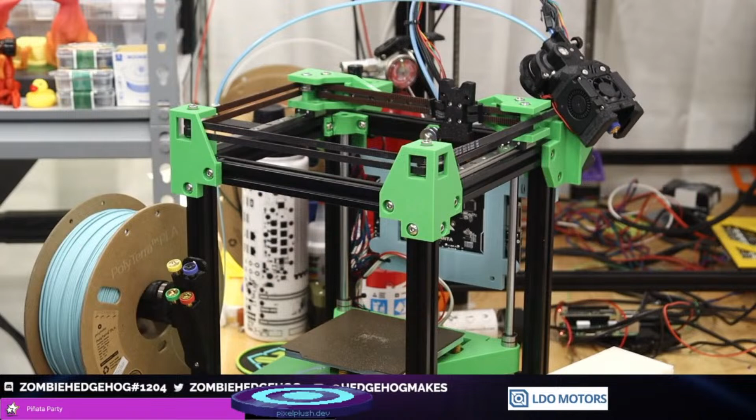I have two of these NDI cams. I'm going to delete this one. That was the wrong move. Wrong one. Okay, that is the correct one. This one I delete. Yes. Yes, okay.

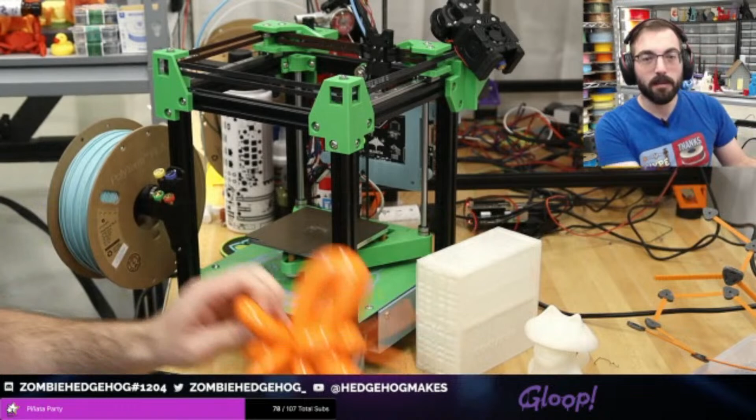I gotta gloop it on when I get my ABS glooping. But this stuff right here, this is PVB, originally developed by Polymaker as an alcohol smoothable material, but printable like PLA. So you dry it pretty well, you print it, and then you spray isopropyl alcohol on it, and it turns shiny, and it kind of melts the outer surface, which creates a really nice smooth finish.

You can kind of see on the bottom here, this is all smooth, so it's really kind of soft, and it kind of feels plastic-like, you know what I mean? It has that kind of texture. But it does a great job of hiding layer lines and stuff like that. So depending on if you like the look or not, you might want to look into Polysmooth.

I did that as a test because it has very similar properties to PLA, except for heat resistance, and I think it actually has more heat resistance than PLA. So your mileage may vary. I'm not saying this is the best material in the world to build printers out of, but give it a shot. What's the worst that could happen? It just stops working, I guess. But I'll be putting this through its paces.

I had one fracture in this part right here due to shipping, and then this broke down here due to shipping. Otherwise than that, it seems pretty good.

Yes, it's very similar to acetone smoothing ABS. In fact, if you had Polymaker's Polysher, you could just throw these parts inside of it, let them cook, and then you have a nice, beautiful, smooth part. And yes, much, much, much safer than acetone vapor smoothing for ABS. I wouldn't even really consider that. I bought some, but just for welding, and even then it's just not something that I want to use or recommend.

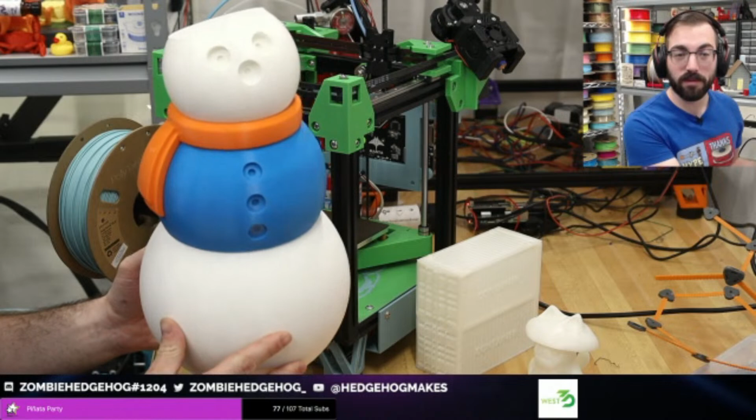There was just a model released that's a party hat, and this Friday, 5/12, May 12th, is my birthday, and I'll be using this platform in probably the same configuration to stream onto both platforms, and we'll celebrate my birthday. So I'll print off that hat, I'll throw it on here, I'll print off the rest of the missing components.

I think I have the arms around, but I put it away because I only have limited space in my studio, and I had it out for many months. So it's going to make a return. I'm very excited because this took a little bit to print, and this is all poly smooth, but I didn't smooth it. I found the finish to be pretty nice, unsmoothed. So I'm happy.

So no hat yet. It was literally just released like a couple hours ago. So I'm pretty excited.

Yeah, Steve knows. In fact, it's the whole thing with Steve, Modbot, Nero - those viewers wanted me to stream on YouTube because they don't like Twitch. So you're getting the Twitch experience on YouTube. I hope you like it. It's literally the same thing, just a different interface.

But let's see if I can do this. So how's the volume of the audio? Is it any good? Happy almost birthday. Well, thank you - 2 days. We'll have some fun.

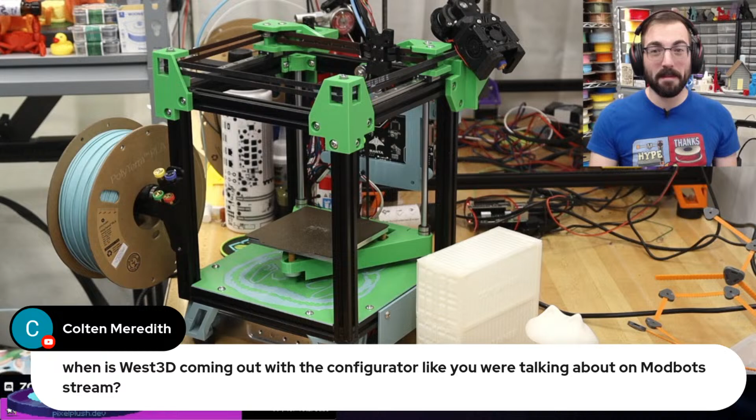So let's switch back to this one. Yeah, there we go, this one right here, and then we'll talk about the Rook. Oh, I can do this? Can I? Oh, this is why I like StreamYard, because I can do this. Bam, that's amazing. When is West 3D coming out with the configurator like you were talking about?

Okay, so that's coming out whenever I finish the Rook. So you're waiting on me to essentially verify that the whole thing is done and ready. I think he can probably release it as is once he has all the parts. So maybe we're waiting on some parts coming in, etc. But when all the parts are in, then he'll release it. And then he's going to come up with either an upgrade path or a special kit that uses my recommended parts. So if I'm recommending a different motor or a different hot end, etc., it's probably going to be a slightly more performance pack type of thing. So I've been working on that, and Gulsifer has been doing all the design for it, and we'll see what we can do, because it's a lot of fun.

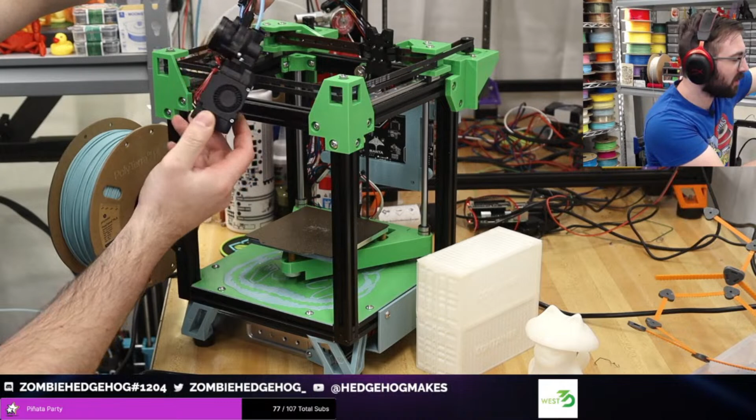So back to this. Again, this is Rook 2020, and I decided to use the Dragon Burner. This is a tool head for V0, right? It's a nice little compact, there's almost no printed parts. It has a Revo in it, Revo Voron, and an LDO Orbiter. And this is the nice little package that I put together for this build.

And we're about to replace the back plate. I might need to put on this side. There we go. So this little mounting plate right here, it puts the tool head a bit too far back and interferes with one of these rear components. So Gulsifer made it a little bit thicker, and we're going to install it.

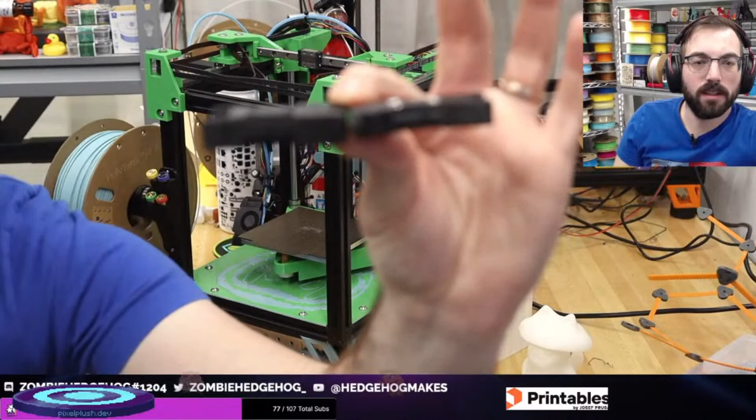So it's a little bit thicker and printed better. Because wow, that's printed a lot better. That's insane. Let's see if I can zoom in on that, because that's kind of interesting.

Focus. Oh, just press it manually. There we go. So this one right here was printed on the Kywoo. You see what kind of walls we're getting on that Kywoo? They are nasty. It's almost like fuzzy skin mode.

And this was printed on the Rook itself, like a little bit of self-replicating parts. So much better surface quality compared to whatever the heck that printer is doing. Ugh. So that's the reason why you want to build your own printer.

Yeah, new song. Is it Belted Z? Yes, it is. It is in fact Belted Z. When you turn off the printer, this gantry will just fall. So I'm currently trying to work on a better end stop because it will slam against the end stop, and the end stop is just mounted with PLA. So yeah, we'll try to make a better end stop or something for it. In fact, sensorless homing works really well in these printers because you can just slam it and force it at the bottom.

What filament is that? This filament right here is Galaxy Black from Polymaker, which is one of my favorites to just use as a random filament. I just print stuff in the Galaxy Black because it looks so damn good. That's my go-to. We're actually talking today - would you guys be interested in more Galaxy colors? Not the metallic, but the special Galaxy powder they use. And if so, what colors would you want from Polymaker in Galaxy?

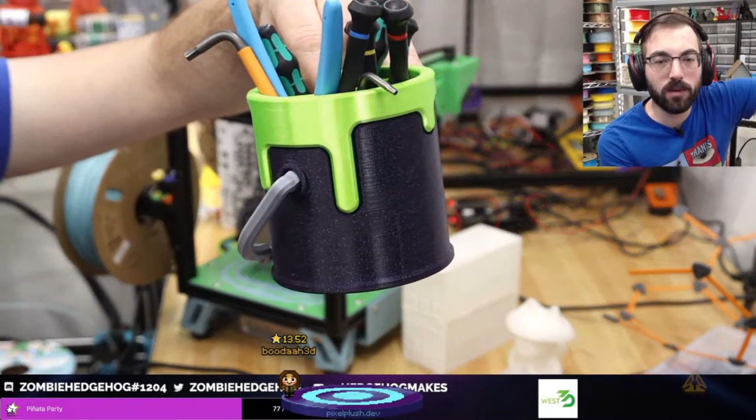So go take a look at their site and see what they currently have. The Galaxy Dark Blue is my favorite. I should probably reprint this because it's not the best quality, but the actual glitter used in it is not just regular glitter. It has like a blue sparkle to it, and it looks really good. I quite like it. It's subtle, but I love that effect. So I'd be interested in some more colors of that, for sure.

A couple thin TPU bumpers at the bottom. Well, that's the thing, it has to have an end stop. And nope, drop does not work on YouTube. That's why you want to go over to Twitch, because you get drop game.

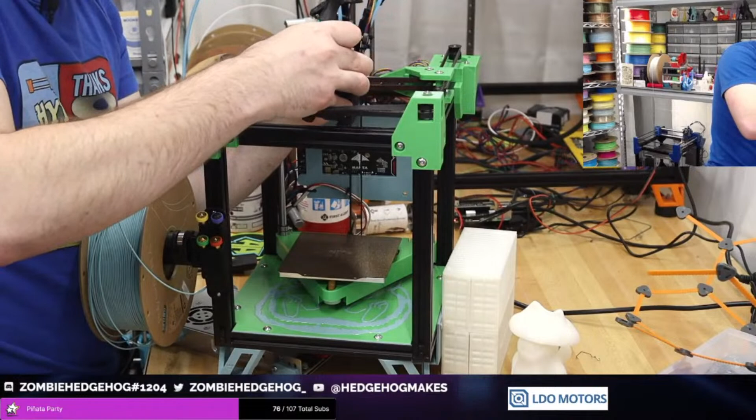Let's see, this connector is very finicky how I have it, so I gotta somehow get it in here. This tool head... oh wow, how did I have this last time? Nothing else has changed, right? Why is this being annoying? I think I had this very closely shoved in here, and now it's just not liking the orientation it's in or something. Let's see if I can fix that.

Upgrade all the things, yeah you can, just don't expect to upgrade and get perfection. You have to put in work, you have to tune your printer, you have to use it. You might have to change, might even have to change stuff in your slicer which you wouldn't even think about. If you change out your extruder, for instance, you might have to change your flow or your pressure advance or something, even though it might seem like you don't have to.

Finally done with the testing. Yes, we're done with testing. We are live streaming like a pro streamer.

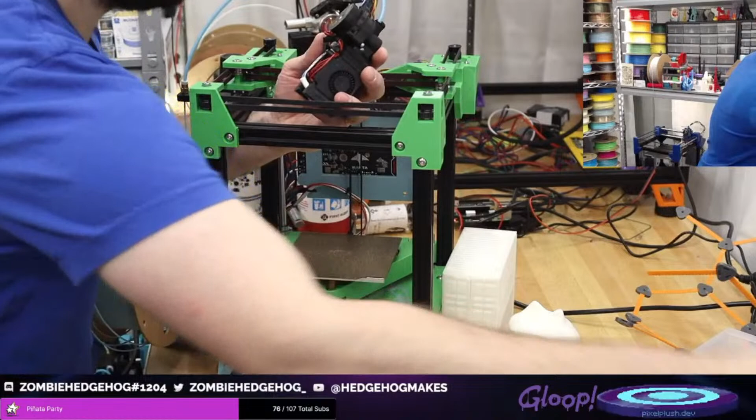Just trying to see how this went on originally, because my little setup isn't happy. I don't know why it's not happy. What I'm probably going to do is just trim some of these zip ties and figure it out as I go, because, whatever.

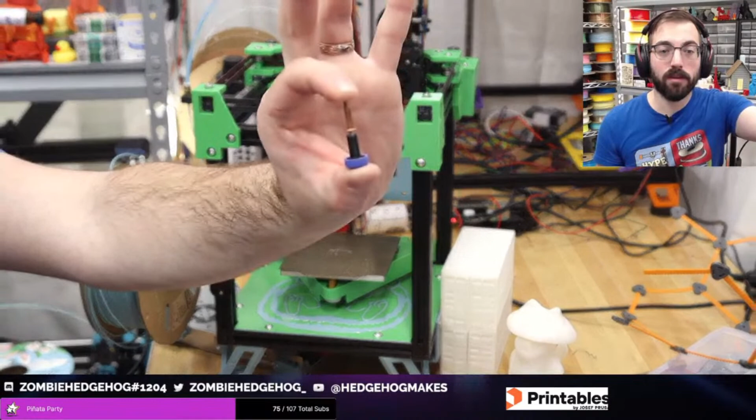I got this nice Revo holder designed by Mad Monkey, which is nice and incognito because I'm using that Galaxy Black filament. It's nice to be able to use a printer that's essentially all PLA, because you can just print anything to use anything. PLA works great for printer parts.

It does, but the issue is heat. So maybe on this printer, on the motor mounts, you might have to replace them sooner, or screw in your screws once in a while. But I find even with ABS, if you're printing in a hot environment, you still need to tighten your screws and adjust stuff. So if you're not printing ABS, just print your printer parts in PLA and call it a day.

I think these printers really prove that it's possible. Is it optimal? No, it is not optimal. I would not suggest or recommend you do that, but if you want to try it out, go ahead, give it a try. You might be surprised how well PLA works for printer parts. It's actually stiffer than ABS, and under normal conditions your parts shouldn't crack. That's kind of a rarity, it shouldn't crack unless you have very poor filament. If you keep it cool, it'll work.

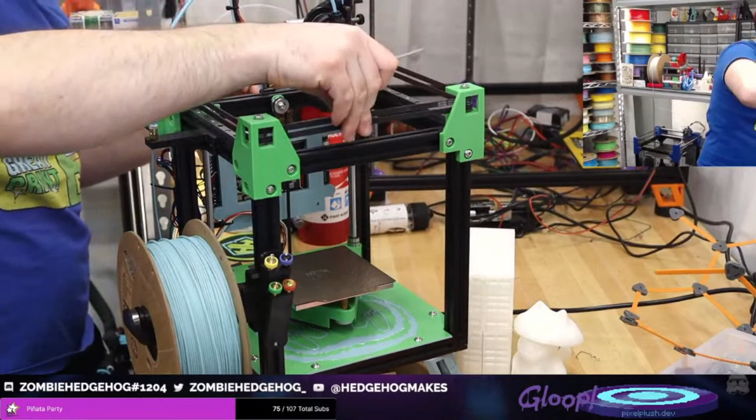Let's see, I gotta tighten this. The motor tensioning system isn't optimal. Any printer that uses the motor mount to tension needs improvement of some sort because it's just not great. So this will be good enough for now, it's not really that tight, but we'll deal with it.

There's nothing that limits you to only one type of filament on your printer, just be careful where you put materials. I had a fully PLA printer printing ABS parts for a couple weeks. The only thing that got loose was the shroud on my hot end, that's it. It was actually kind of shocking how well it worked if you don't have a super high ambient temp.

Have they come out with the hardened Revo? Yes, that is this, this is a hardened Revo. In fact, to install it, you just do this: you take your Revo and you unscrew it. I have filament loaded right now.

Looks like a green wrestling ring. I know it does. I don't like how there's a belt in the front here, because it means you can't look at anything neatly.

So we just removed the Revo hot end or nozzle, and I can put it into here. I can swap it out with the Obsidian, and I can actually remove the filament too, because I'll swap this out.

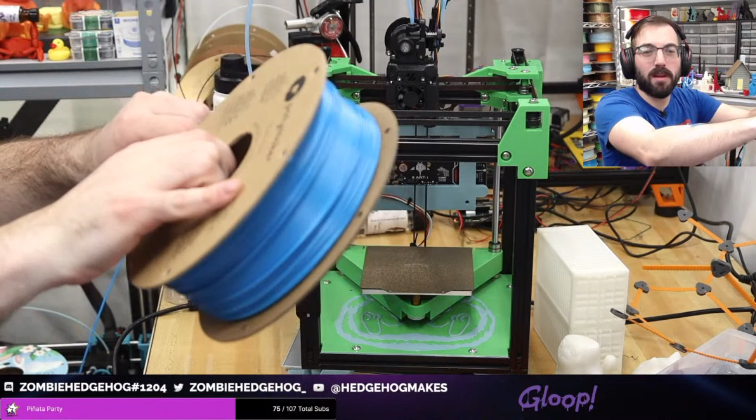Okay, let's see, I currently have some pop blue ASA printed for someone's tool head that I've been working on. Oh, there goes the cover. We'll remove that nice, beautiful pop blue Polymaker ASA. Absolutely gorgeous and out of focus.

The spool comes out of focus, by the way. Put another K2 clip on there. K2 clips are great for storage, but sometimes they do get in the way of printing, so I just remove them sometimes, depending on the setup.

All right, there we go. Put it up here. And I can set this to maximum temperature because this thing is a great little dry box for nylon. It goes really high temps, and I've had great luck.

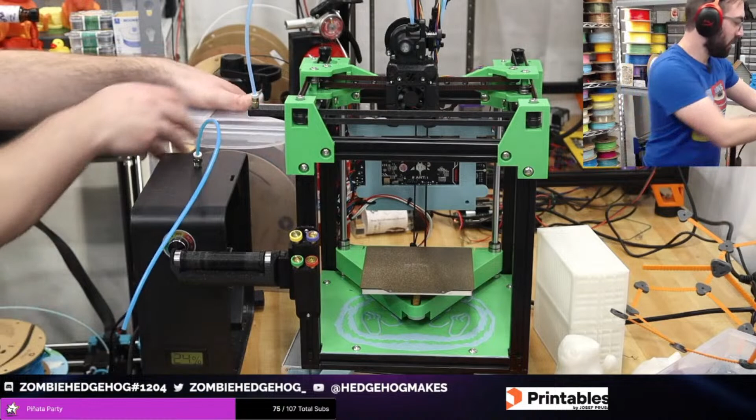So the interesting thing about a dry box is that it will actively dry it as it heats, as it extrudes. So as the outer layers become exposed, it'll dry out the outer layer quicker than the inner layers. So you can theoretically just leave it in for a few minutes or X amount of time depending on how wet it is, and then start printing. You don't have to dry it for 1,000 hours if you're continuously drying and printing. So I found that interesting, and I've used that to my advantage many times when printing different materials like this.

Print some feet? Some feet? Yeah, what do you want me to print in this PA12 nylon that I can actually print on stream? What should I print? What do you want me to print?

And then I can remove this little Bowden tube thing because we're not extruding out of here, and I can put on this one. Another reason why I like the reverse Bowden setup is that I can just put in a new tube. I think it's long enough, I'm pretty sure it's long enough.

I can prop this up using these cargo containers. Using the cargo containers, try that, I guess.

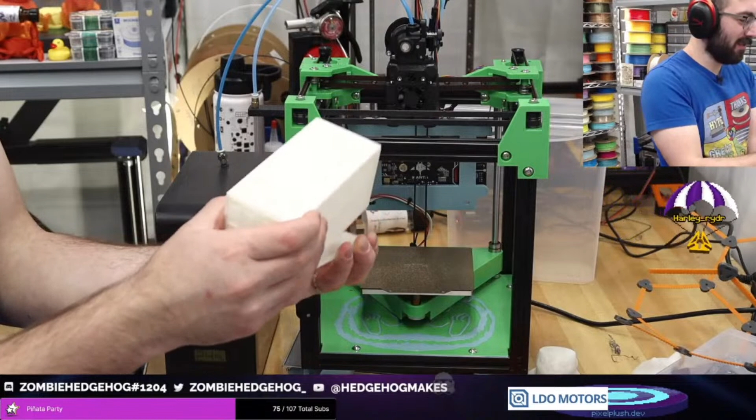Any comments? Aren't there some line dryers? Yes, there are some dryers for industrial use that are specifically designed to dry filament as it goes. It kind of focuses the heat onto the filament path, but something like this works just the same.

It's a lot cheaper. So there it goes, propped up a little bit. I love it, practical prints, am I right?

Who made the Revo nozzle mod? What do you mean by that? Oh, the bottle opener, okay.

I think, can I click a link? I can't click a link. What? That's weird, I can't click a link? What is this nonsense? Can't click a link in StreamYard. Huh.

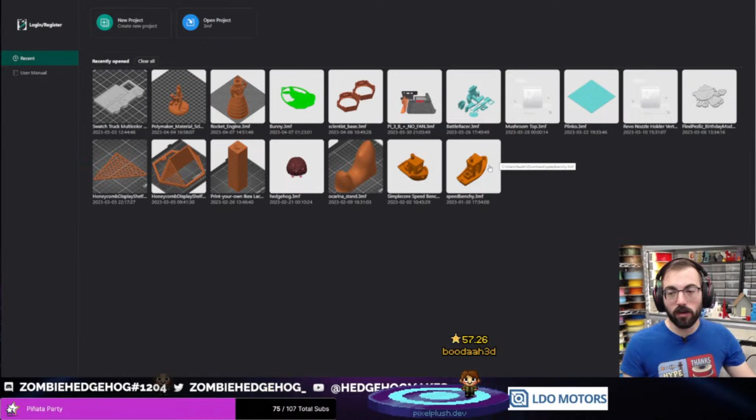Alright, one thing to note, and this is very important: if you're printing a nylon, a carbon fiber nylon — I don't know if it's any nylon, but the CF nylon — requires an interface layer, so you'll want to make sure to use glue stick. Otherwise I think it adheres too much, at least this is the recommendation from Polymaker. So always just put some glue stick down whenever you're printing CF nylon. I don't know what would happen otherwise, and I do not want to find out.

So I can switch over to my Rook 2020, 0.6 millimeter, because this is a 0.6 millimeter nozzle. We're gonna select — see, this is the issue when you have all your different profiles in one list. Hopefully SoftFever will fix this soon. But we want to do Rook, and I think there is a PA6CF Rook profile, I think that's about right. So I'm gonna print that at 280C.

This is probably fine, I set a max volumetric rate of 10 millimeters a second. The first layer is way too high, really want this to be about, I don't know, 40C. You don't even need a heated bed for this, but I just do 40C so it has a nice set point to reach. A flow ratio of 1, is that right?

Oh boy, I don't know if this profile is 100% right. I don't think it will be 1, but let's do 0.95 just in case — I don't want to try a 1 if it's not going to work well. So I'll save that. And then for our profile, let's do a, here we go, Rook 2020 0.6. Perfect, 0.2 layers, mostly 0.6 line widths. Great, I have to do 0.66 because I have a reduced flow, and I want my minimum extrusion to be wider than the nozzle by a little bit.

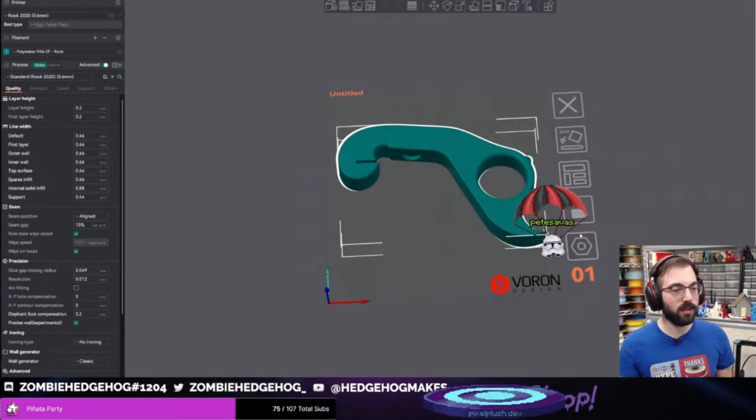Go. Let's see if it'll fit. Moment of truth — it does. So let's switch back over to this, and then I'll hit print and see what happens.

If you put glue down, do you think it would be safer to use a smooth bed instead of a textured bed? I mean, it doesn't really — I don't think it matters too much. I've had pretty good luck with textured beds and nylon. So I cover the whole thing — you can put glue stick on pretty much any print anyway. You can do two thin layers going each direction, a little overkill but it works. And this is the SliceWorks glue stick, so this was sent over in a sample box by, I believe, West3D, and it's worked out pretty well.

The first thing I'm going to do, and this is a great sanity check: if you're unsure if you're using the offset, all you gotta do is heat up your bed to whatever printing temp — so my temp is 40°C, and I'm printing at 280°C. Just home your printer, okay. Oh, much better — maybe a little bit too aggressive on the Y, but it's fine.

So home it, then go to the middle of your bed, which for me is, let's see, 60. Oh, I clicked the wrong button. 60, and then 60-ish right here. And then go Z equals 1, and then look at it.

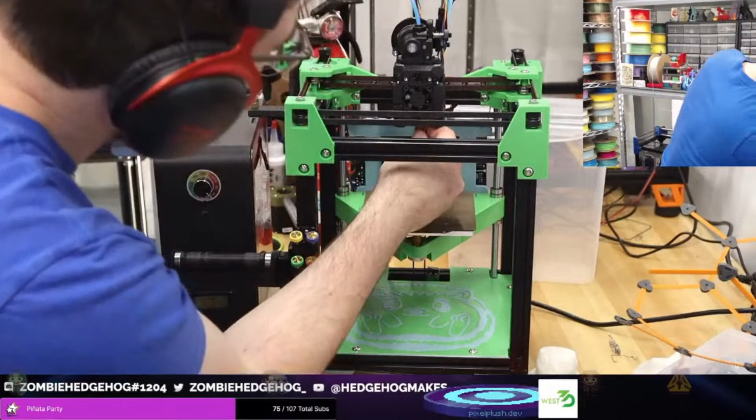Look at the nozzle, right? It's a little hard to look on this setup, but it'd help if I installed the nozzle. Find the gap — so you install your nozzle. Something's wrong here, there's a bit too much of a gap. So you just find the hole, wherever it is. Where's the hole? Where is the hole?

There it is, I think. Oh, it's because I have filament. That's why. There we go - filament sticking through. That won't help.

I got a bad feeling about this. So we just tighten it, just like so, until you can't tighten anymore. And then hypothetically, that'll be at a perfect offset.

So let's try this again. Heat up, like I said, heat it to 280, and then 40°C in the bed. And we'll move it to Z equals 1. I should be able to see, you might be able to as well, that it is perfect. Now let's try 0.

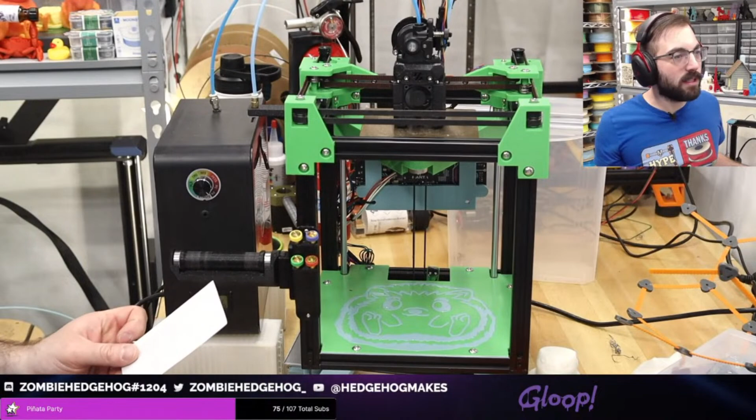Let me see right now - is it correct? It might be correct. Oh, there's glue stick, that's not going to work very good. Maybe it's good? You know what, we'll try it. You can't tell now because it's heating up. We'll try it, we'll see. It could be good, it might be good because I've already tuned the offset. So we will see if this works.

Why is it taking so long to heat up? Not used to ceramic heaters taking this long.

Line width 1.5 millimeters, right? Fun fact, you can extrude much wider than your nozzle diameter - you can do up to 1.2 or so millimeters on a 0.4 nozzle without too much issue, just go pretty slow.

Maybe without a nozzle it wouldn't even heat up the filament. No, it wouldn't - it's not like an inductive heater. If it was an inductive heater, it might. That'd be interesting.

All right, let's see, so let's go to this right here and hit print. I don't even know if my IP address is correct. Oh, let's do the infill. Infill looks fine, this looks good. Oh yeah, it's not hexagon shape.

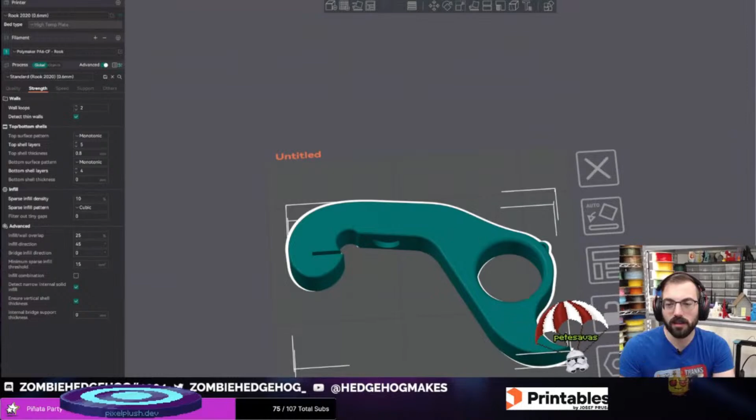Again? What if it's the slicer? It's not doing anything - no, the CPU is... Oh, it is. Is that 100%?

What is using my... what is using... Streamlabs is using a lot. Streamlabs and Chrome. So it's literally just a computer being sucky. Okay.

I have a PC here on my wish list. Well, I could - that's a lot of money. Software isn't even working.

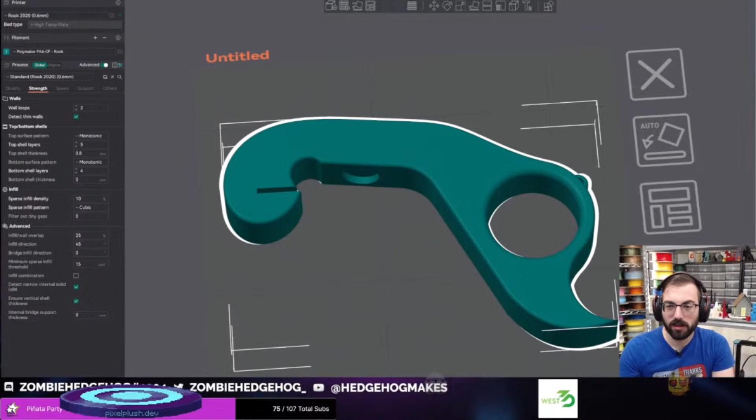It's probably my 10,000 Chrome tabs that I should probably kill. We'll fix that after, but let me get through this. We want a honeycomb infill at 15%, like 4 walls, 0 top, 0 bottom. And prepare to die.

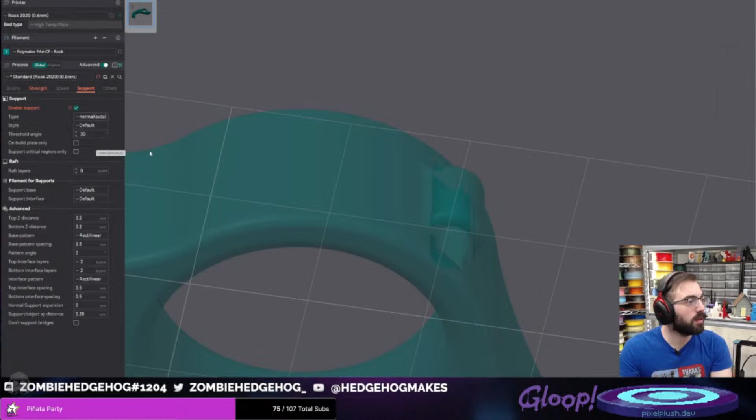Okay, so we're gonna try printing this. Now let me kill some tabs.

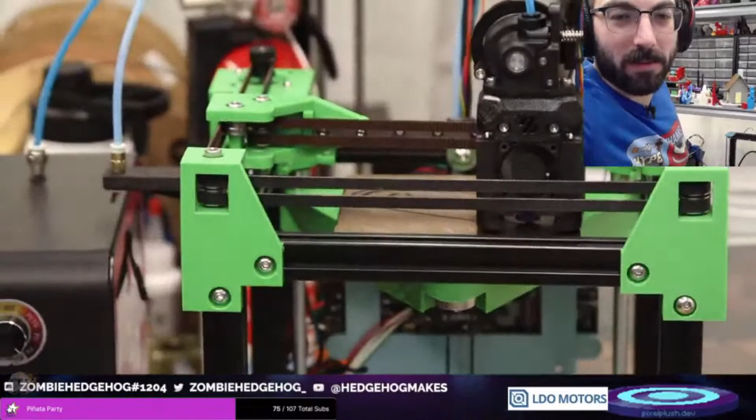So let's zoom in on this right here, get a nice close-up of what we're working on. Yeah, oh, that belt's in the way. Go, I'm a pro cameraman. Yeah, there we go. Higher, go. Beautiful, beautiful, gorgeous.

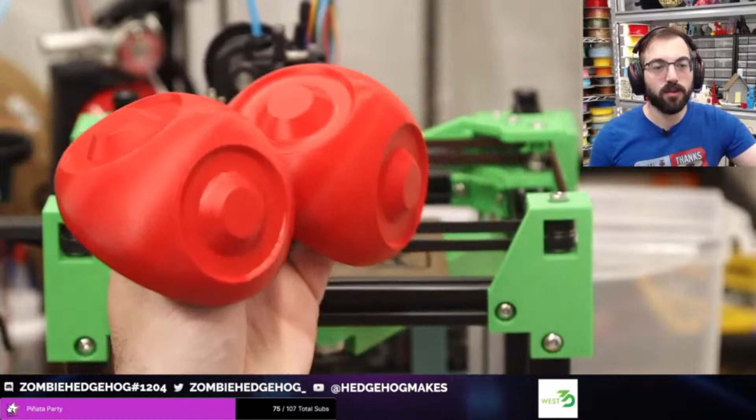And the camera's probably gonna shake a little bit, but yeah, so this is my printer. It's pretty nice, it does actually print fairly well, all things considered. I printed off these, I'm doing some testing with different resolutions, and I printed off some of 3D Printy's mushroom tops, and I think they look pretty good. This is just Polymaker PLA Pro Red. So pretty decent overall, depending on what you print.

And this still isn't even remotely tuned in. I YOLO'd the belt tensions. Nothing is really fine-tuned, but it's tuned enough. But we'll see how this works.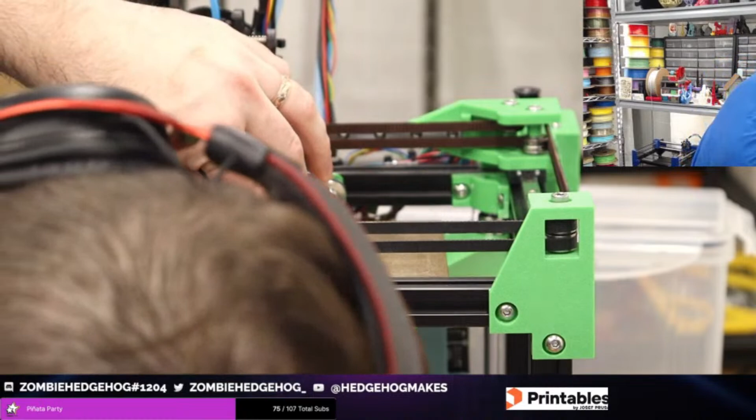Yeah, this side's way too squished, and this side's not squished at all. So it's like tilted this way. Need to loosen this side a little, maybe. Loosen that a little bit. It's so hard to get a manual level on these beds.

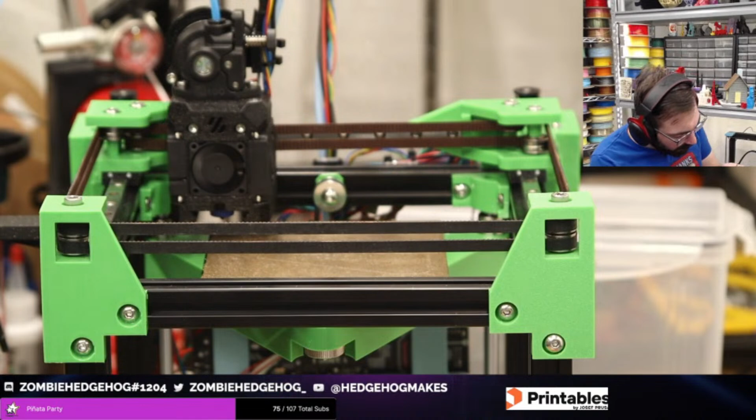And then in terms of flow, a little bit lackluster. I'll keep it on a flow of 1. We'll see. See if that was what it's supposed to be.

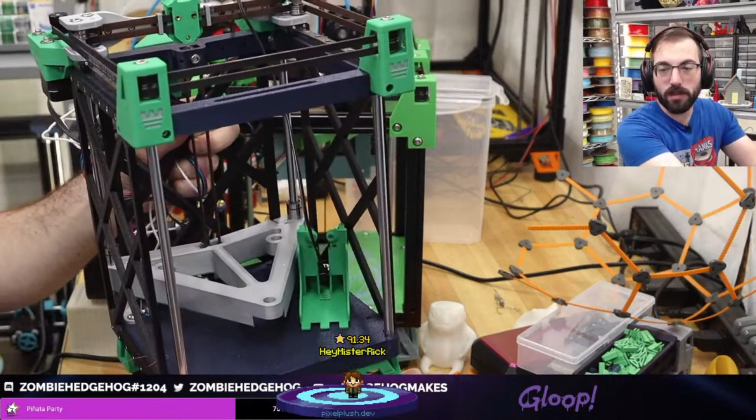You can check out my YouTube channel for, it almost has over like 10,000 views now, but my MK1 build series, I built this. And I had some quality issues because I think the frame, if I squeeze this, like the rear frame just isn't stiff enough, it seems like. So I reprinted the part and I will rebuild it and retest it with new parts and see if I can fix whatever issues are happening. But this was definitely a fun printer to build, and even though it did have some minor Z issues, which some people wouldn't even care about, it's a fun build.

So I will be working on a West 3D version coming out shortly as a kit, and then I'll be able to show that off as a stream. Have you built the 180 yet? I believe it still needs an update, it's not finished yet. And yes, I have many other printers that I'm working on. In fact, one of them is the Rook Evolution.

So this is still, I haven't really touched it because I've had so many other printers that I'm working on, but this right here is the Rook Evolution. It's a fully 3D printed enclosed ABS printer.

It's a bit chunky, about 150, but it's a project printer. If you want to print a lot of stuff and you like printing ABS, this is all PLA for testing, but you should print this in ABS. Go for that.

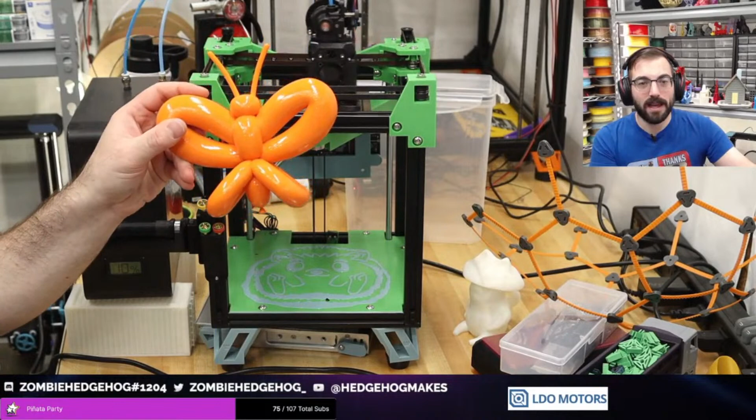Looks like the PTFE is borked. It's supposed to be like that. This dry box has an absolutely terrible design where it just uses this rubber gasket that's too big to actually stop the Bowden tube from coming in. So what'll happen is you'll put the Bowden tube in, it'll slowly creep into the roll and get tangled. It's so annoying. So what I just do is I put a Bowden connection on the end of it that holds this from coming in. That's it.

And the hole is too big for one of the smaller Bowden adapters, but too small for the bigger one, so I just do this and call it a day. It's actually a quite nice setup because you put the filament through, then you slide this over. Yeah, works well.

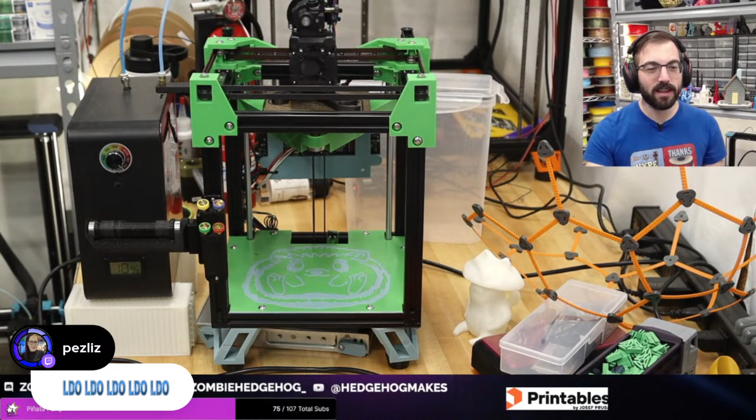Lovely person. We have some new LDO emotes. These are just released, I guess they're in beta. What do you think? What do you think? You don't like him? Needs work? Alright, well, play around with them. You gotta put them on stream to see how you like them.

Think about doing your first non-mag bed. Non-mag bed?

Needs work. Doesn't. I like it, we could probably play around with it a little more. Non-mag bed, I've never used a mag bed. I mean, a magnetic sheet works fine, it just does. I haven't had any issues on that.

You like the LDO symbol? I do too, I like the symbol too. There it is down there. So maybe we can work on that, get the symbol but fancified, like you had it originally.

What controller? I'm assuming you're talking about this printer. So we are running a Big Tree Tech Manta M4P, because we only need 4 drivers. For a build like this, it's nice to have everything integrated in a compact package, so no additional pies just dangling around, nothing, it's all integrated. And that means I can take this with me, so it's a great little travel printer. If I want to just bring it around, I can.

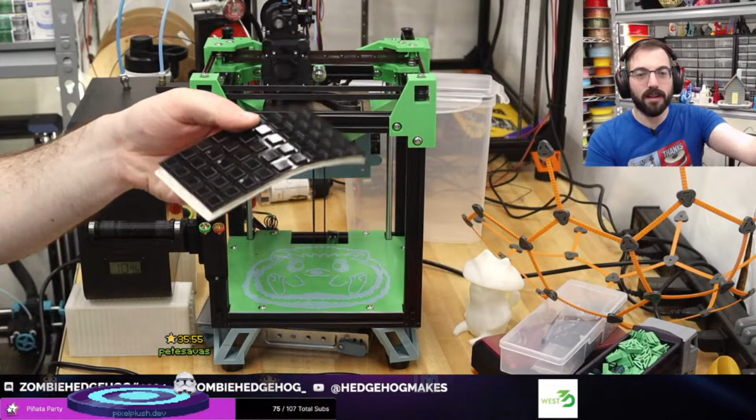I actually bought some sticky feet for the Bugaboo. I'm interested in giving these a try because it's literally just sticky rubber. Just enough to keep it from sliding around, so I'll see how that works out for me.

So CP Geek's V2 was all West 3D. All your V0 accessories have been bought from West 3D, but your V0 kit was bought from a user in the Garage Sale channel. Oh, neat.

Yeah, if you're looking for some used Voron parts, a lot of people buy this stuff and then decide, oh, this is too much for me. And maybe they played around with it too long, can't really return it. It's hard, once you start building a Voron kit, you can't just return it. So it's sometimes easier to just sell it. Keep an eye out for people that might even be local that are selling their Voron kits because it's too much for them, you can get a good deal. Sometimes they're even assembled, and they're just assembled poorly, so you just have to tweak it a bit.

So what is our ETA on this? 20 minutes? I guess we'll let it finish. We'll go until this print finishes and then call it a night.

So should you build a Rook? I would say if you're looking for a bit of a challenge, or you're looking to just build something new, it's a fun design. The 2020 version is even what I would consider a more reliable and more practical printer than the regular Rook.

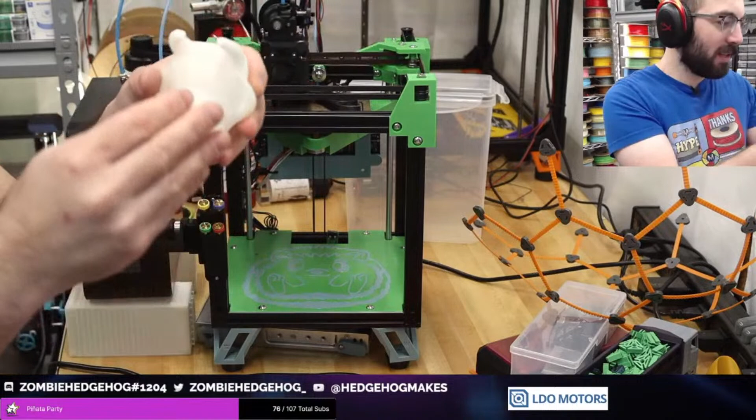I can't really - of course it's going to be nearly impossible to show, but yeah, this was printed on the smooth, and it's going to blow out the camera. You can't even really see what this is, but feel-wise, this is pretty smooth, and the top has a little bit of a texture. Of course this is angled, but still it feels like PLA. So just the difference between the smooth side and the printed side is jarring. It's not completely perfect.

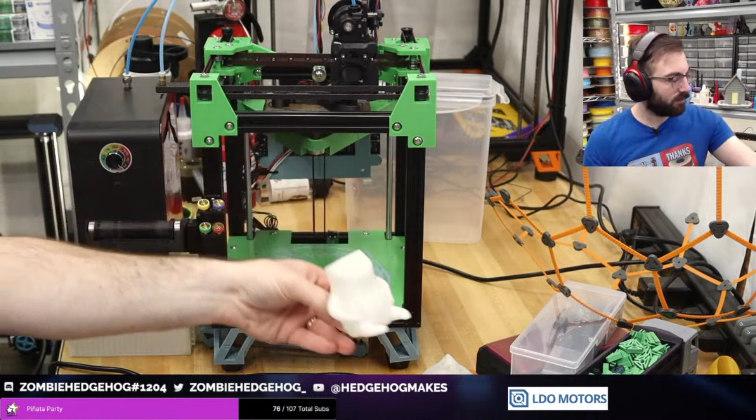Do you guys have any recommendations for a print in this color right here? It's kind of like a natural white color, this is an ABS. Any recommended prints? And not just a fun print, like a practical print? I don't know.

Put new mainboard and wired the fans in wrong. Ah, that'll blow them up. Yeah.

E3 V2, okay, you put Klipper on it. Nice, so you are newer to Klipper, right? How do you feel about the overall experience from someone who might not be as used to Klipper? I'd love to hear your feedback.

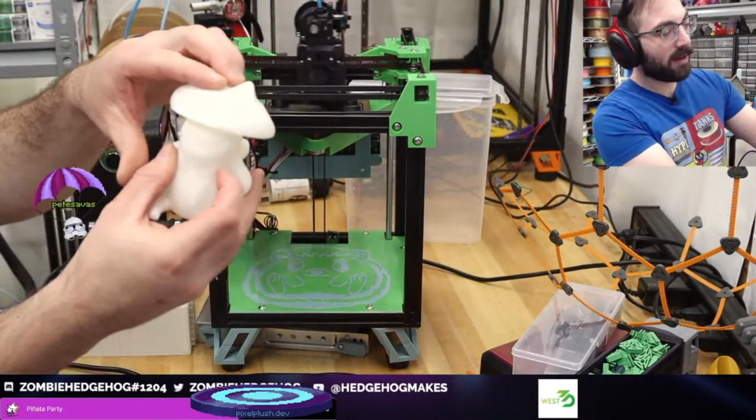What is that white creature thing? This is an IK 3D model, it's supposed to be a mushroom cat, so it's a little like mushroom cat. And it's hard to see in the white, but I think it's pretty cute.

And it prints really good in the 2.4, like extremely good. I'm very happy with how the 2.4 is printing in ABS.

Have you ever printed all the parts to make your own 3D printer? Well, you're looking at one of them. I have the Bugaboo right down here, if I can show it. So this is a Core XY printer.

There we go, right here, where all of the Z belts are linked. So it's kind of similar to the VZBot, but like a Tri-Z version. I don't know if the BOM is less or more - I can't really tell. It's obviously less than a VZBot, but it's also not as rigid. Still, that's a neat little printer.

And so far it's been pretty fun. I just printed off all those parts, not the extrusions though, and of course this right here. And then, of course, I built the Simple Core right back there - that was my first fully custom 3D printer.

So I decided to install the ERCF on there for now. This camera got bumped, I gotta do something about that... still too low... too high... whatever, good enough.

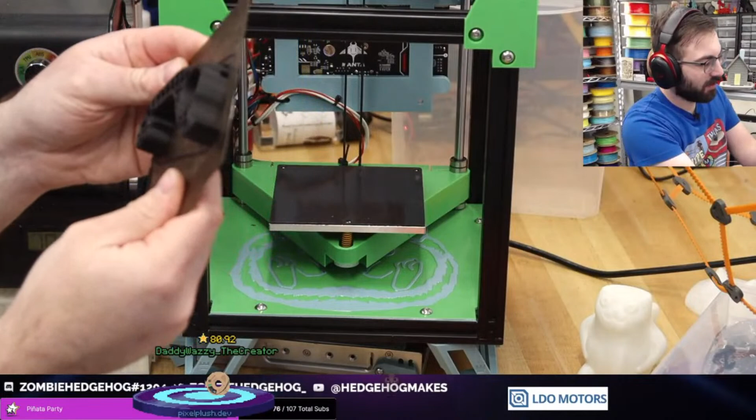Overall, not bad. This is my first nylon print on the Revo. This is Polymaker's PA12 CF. We printed a bottle opener to show off the sports camera. The most ridiculous things to print in a PA12.

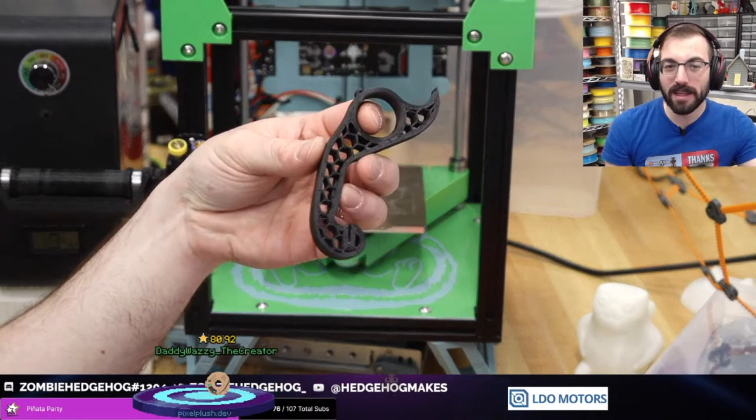Do you have the beacon set up? Yes, I do. I can show you a mesh that I did. It probably needs some work on the offsets. I think I had a little bit too much squish, but I think it's probably pretty good. Obviously no top layers, it looks a little funky, but there you go.

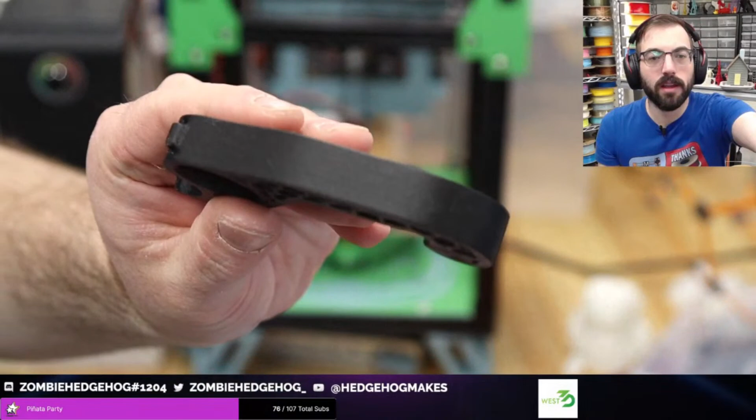This is the wall quality on it. Given this is a carbon fiber filament, pretty good. Pretty consistent. Looks good in real life.

I could anneal it too if I wanted to, but I don't even think I would bother with this.

Let's see if I have a saved bed mesh. I don't. Let me run a bed mesh for you. You want to see the full works? Well, here you go.

Because I paid way too much for a beacon, and I should get as much use out of it as I can. Now given it's a very good probe, it's just like a lot for what it is.

Oh, this camera keeps bumping this. Weird. There we go. That's still high. Whatever, you get the point.

Rocket Playhouse, and do you go ductile or rigid? I'd have to see the model, but in most cases layer adhesion always tends to win. So like an ASA, and also what color you want it, and if it's easily printable in an ABS or ASA.